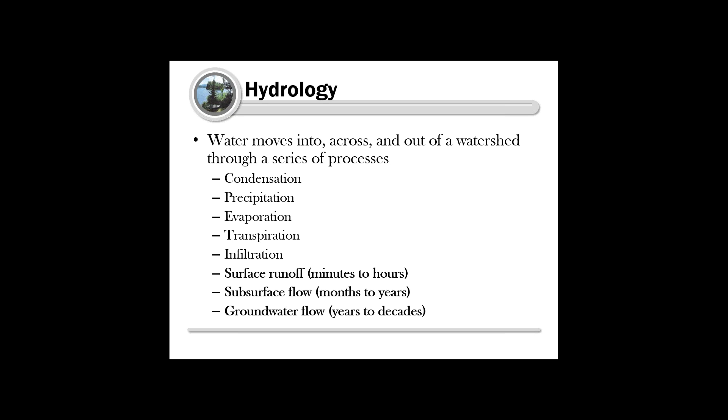For instance, surface runoff, which in a natural landscape is a small portion of where the water moves as it hits the ground, is on a really short time scale, sometimes seconds, minutes, and hours at the longest. Subsurface flow, like your shallow groundwater flow, is on a longer time scale, months to years. And deeper groundwater flow can take years to decades. That's the time it takes to complete the cycle, falling from precipitation and then being evaporated back up into the atmosphere.

So like I just touched on briefly, in natural systems hydrology, although there's real variability in any natural forested conditions, they'll look something similar to this process diagram, where you have 40 to 50% evapotranspiration, but anywhere between 1 to 10% would be in runoff, so the water hits the ground and flows directly off the surface and into a water body. You get about 25% shallow and 25% deep infiltration.

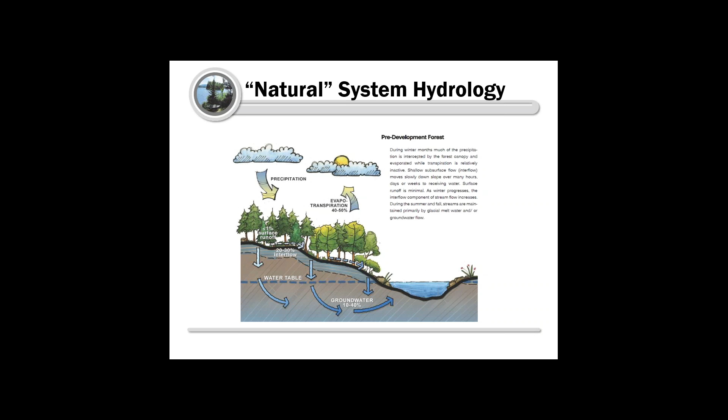The important thing I want you to take away from this slide is that the largest percentage contribution to water uptake in a natural system is through evapotranspiration. It's 40 to 50%. So trees do this work. This is what we're trying to mimic when we move over into green stormwater infrastructure. It's the sum of evaporation and transpiration movement through the plant and out into the atmosphere, and it's a really critical part of the water cycle, without which major disruptions would happen.

So what happens when we disrupt the water cycle? This is a schematic of what the water cycle looks like after we've removed trees and developed a lot. Humans have a tendency to alter the hydrologic cycle because we're involved in agriculture and industry. We put in dams, we deforest, we withdraw groundwater, and we urbanize. All those alterations lead to really drastic disruptions: reductions in evaporation and transpiration due to vegetation clearing, reductions in water holding capacity due to compaction and removal of topsoil, and increased surface runoff due to additional impervious cover.

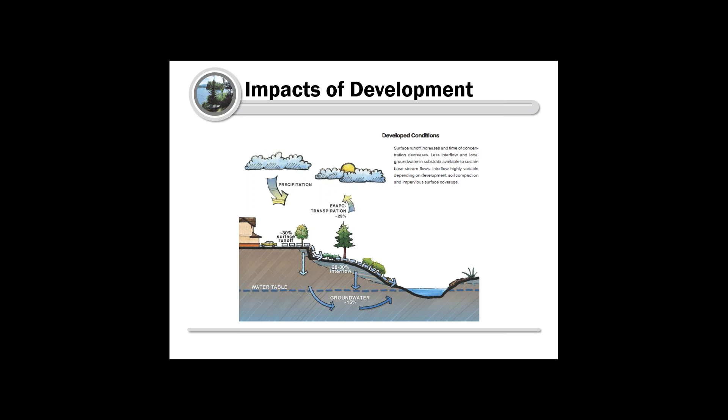The most important takeaway from this slide would be the change in evapotranspiration from 40 to 50% in the natural cover environment down to 25% in developed conditions. That's almost a half, or if we go with the 50% rate, that's a half reduction of what was happening in natural cover. The other notable change is the drastic increase in surface runoff. It moved from less than 1 to 10% to about 30% of the water that falls now running off. And these disruptions have a significant impact on water quality.

12% of the total acreage of Lake Champlain is considered impaired for aquatic life, and 38% of the total acreage of all other inland lakes are impaired. Certainly, stormwater runoff is not the sole reason, but it's a major contributor. I like showing this slide because it helps put this in perspective. One issue with stormwater is that it is dirtier than rainwater, but the other problem is the volume it contributes to natural systems.

So for a 1-inch rainstorm over an acre, if you did the calculation for forest runoff, you would have just under 3,000 gallons running off that lot. The rest would be taken up by trees or infiltrate into shallow or deep groundwater. In an urban environment, you could have upwards of 15,000 gallons. So it's a huge increase.

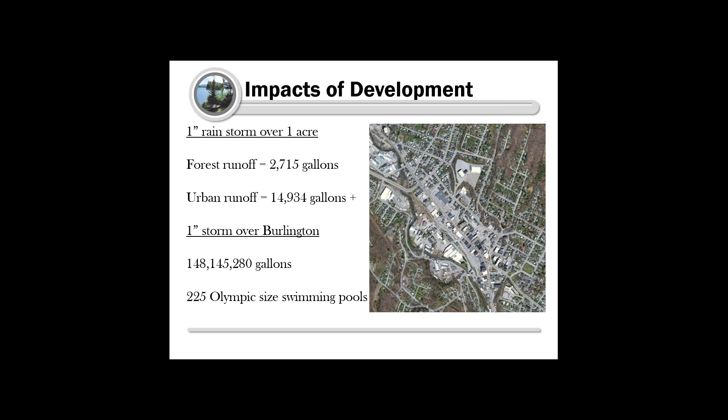We talk about urbanization. If you spread that over downtown Burlington, when we get a 1-inch rain event, you're looking at 148 million gallons of water. Or for those who like to think in Olympic-sized swimming pools, it would be 225 of those. It's a huge volume of water, and really too much for our little streams to handle. So how do we handle it right now? Largely, we use traditional or gray stormwater infrastructure, which treats stormwater as a waste. It's not a resource.

It's considered last in the design process. These are the pipes, conveyance strategies, centralized holding ponds. It looks mostly at surface runoff. It's reliant on large infrastructure, and there's no effort to try and restore natural hydrology. It's really just about addressing the surface runoff volume problem.

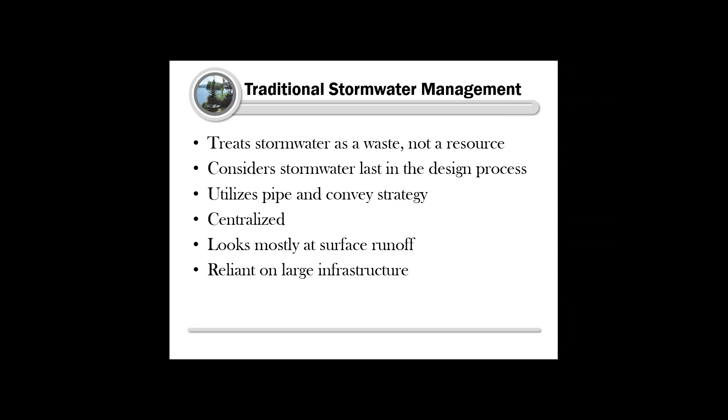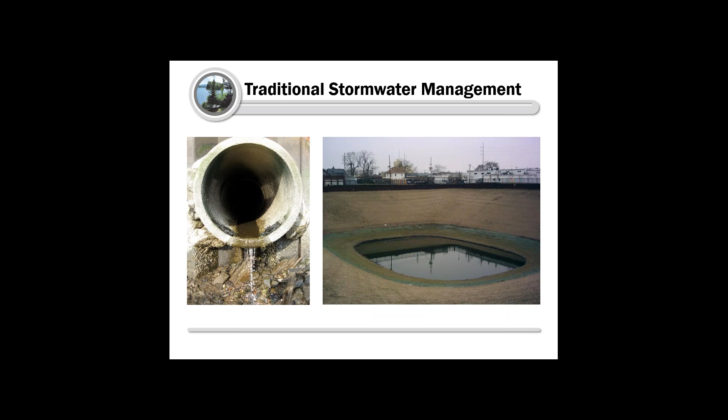So these are just a couple of photos that probably look familiar to most of you, a detention pond and an end of a pipe. And what happens with this traditional stormwater management is it leads to the same thing. It doesn't really solve many of these problems. You're looking at sedimentation and erosion, nutrient loading to the streams, bacteria, trace metals, trash and debris, reductions in base

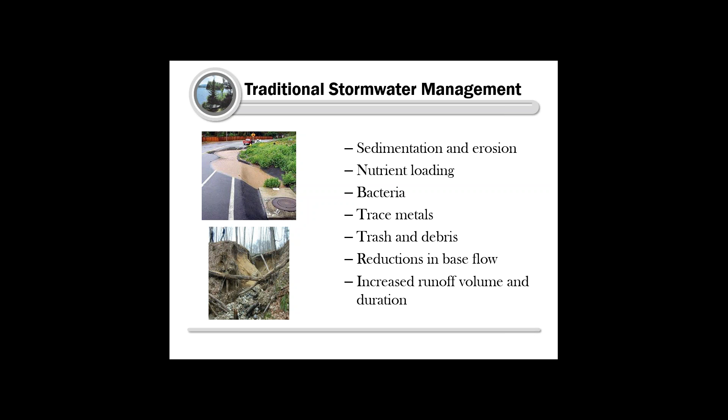flow to your streams. And what that means is if you have a base flow of a stream in a natural environment, it will always flow at about the same rate when it isn't raining. You don't get huge spikes and troughs in the flow. And in an urban environment, you could see streams that would dry up in the dry months and then be really heavily overfilled after a rain event. And it isn't good. You end up with that erosive look like you see with that photo on the bottom.

So what's the alternative? I'm going to talk a little bit about low-impact development just to make the point that what our program does, and it's really a movement across the country and in other places in the world that have been doing it for longer. We're trying to reverse the way we do development so that you don't end up treating stormwater as something to manage at the end, but rather part of the design process.

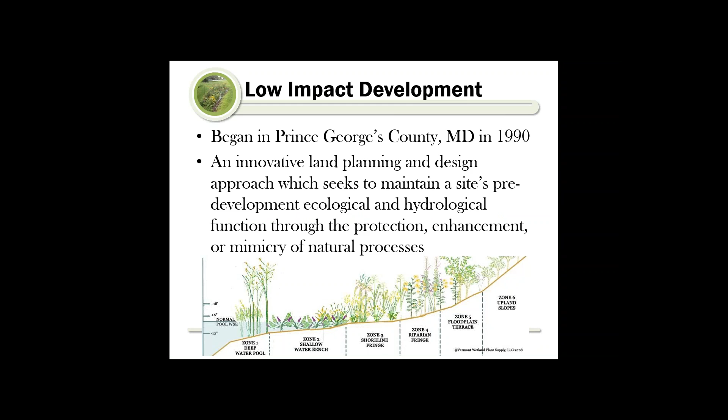So the term low-impact development was coined in Maryland in 1990, but it's really a land planning and design approach, and the goal of it is to maintain a site's pre-development hydrologic function, and you do that through the protection, enhancement, and/or mimicry of natural processes. So basically you're leaving natural areas alone, and then you're minimizing disturbance from the development itself.

And what it means in practice is just avoiding groves of large mature trees, keeping away from established wetlands, while developing in a lot. And these are sort of the key terms associated with low-impact development, which may be familiar to you. Minimize total disturbance, conservation, disconnecting stormwater, protecting sensitive areas.

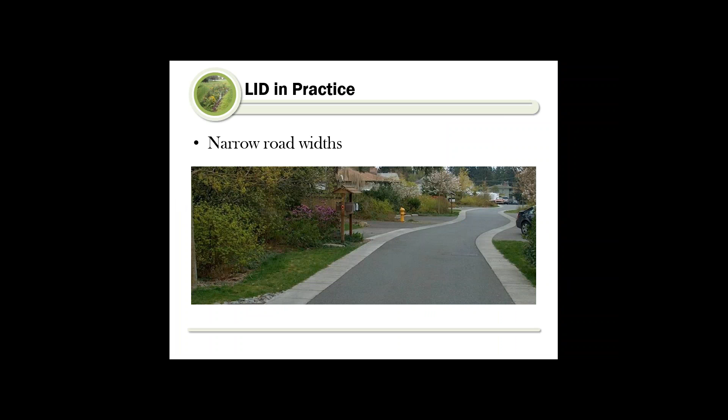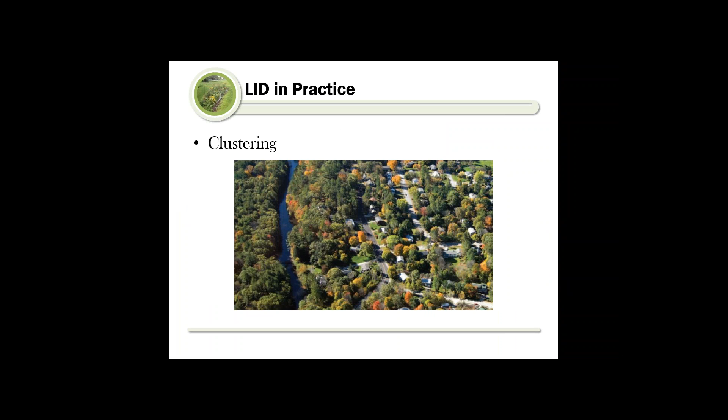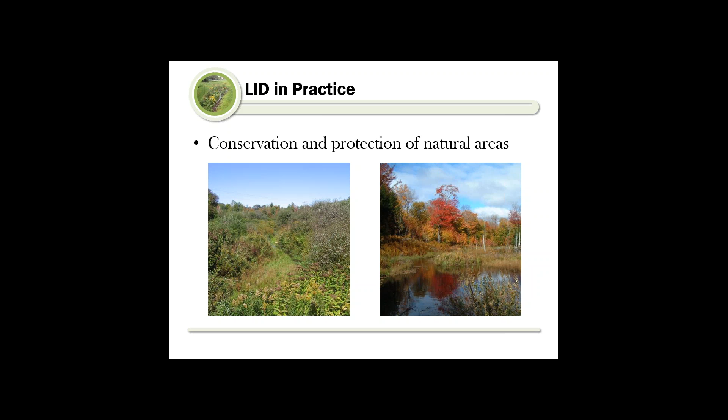So what it looks like in practice is narrower road widths, clustering your development, so you still have wide swaths of undeveloped forested land, but maybe the same total number of structures, but in a smaller area. And conservation and protection of natural areas. And this is true for large swaths of natural areas, but it can also be true for individual trees, where you have a specimen that should be protected and can't be replaced with less than 30 years of growth.

But why? Why are trees important, and what do they do exactly to make them valuable for stormwater management? Well, everyone here today probably has some affinity for trees, and there is a lot to love. They improve regional air quality, reduce stream channel erosion, improve soil and water quality, provide habitat for terrestrial and aquatic wildlife, reduce summer air and water temperatures. There's also research linking them to increased property values, community placemaking, urban heat island mitigation, and an increase in

general feelings of well-being. But today we're focused on one more reason to love trees, and that's their incredible and really unmatched capacity to reduce urban stormwater volume and to improve the quality of the water flowing to our streams and lakes. So they do that by three main processes. The first is interception. So a large mature tree can intercept more than 2,000 gallons of stormwater in a year just by capturing it in its canopy as the rainfall falls on them.

And trees also capture through leaf interception the initial 1/10 of an inch of rain. There's some variability in the studies on where those numbers come from, but the best number I was able to find is about 1/10 of an inch of a rain event. The other thing they do, which has to do with interception, is reducing the rainfall velocity. So you end up with less erosion.

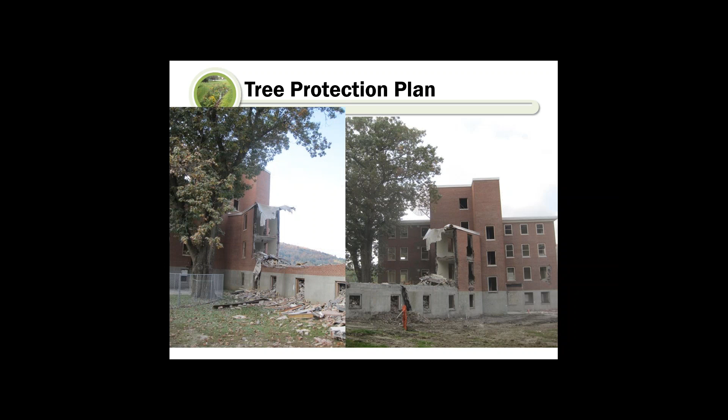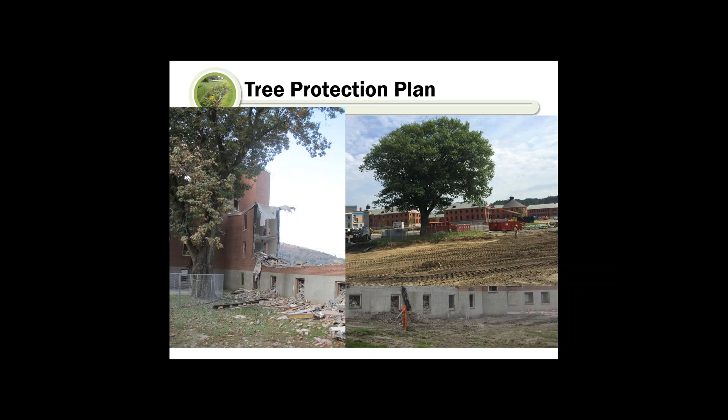And he had this series of fantastic photos that he sent. So this is a gorgeous oak that's right next to this building that's being dismantled, and you can see it's in really close proximity to this building that's coming down. In this photo on the left, that tree is really right up against that structure, and it was able to be protected because they went through a really careful process. Here's a great one. There's just construction all around this tree and compaction, but that tree is surrounded by a chain link fence to make sure that construction vehicles can't go within an area where the roots are and potentially damage the tree.

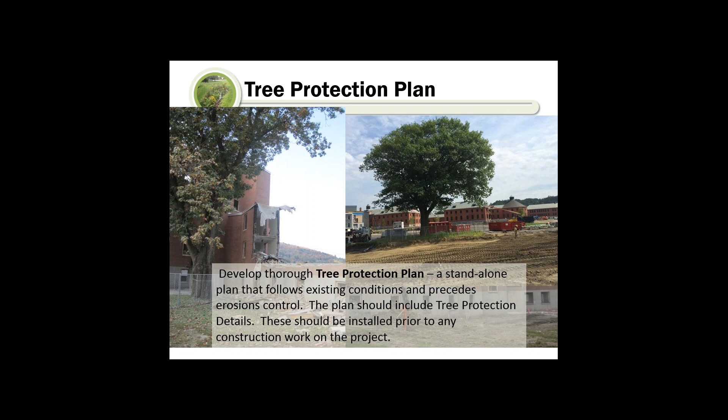So Adam said the second thing that's important about protecting large trees in a redevelopment site is to develop a thorough tree protection plan. So a standalone plan that follows existing conditions and precedes erosion control. So the plan should include tree protection details, and that should be installed prior to any construction work on the project. So these photos really exhibit how they were able to go about that. Some fantastic photos of these large trees really in the midst of what might seem like a chaotic construction site, and they're being really carefully protected.

So this is a schematic of what the tree protection standards would look like. And Adam said this was really important too, that they needed to have tree protection details and specifications. They developed thorough specs that the contractor was responsible for. And he said it really was important to include fencing, signage, root pruning, conditions for filling and excavation, monitoring, and then also a plan for payment for any damage.

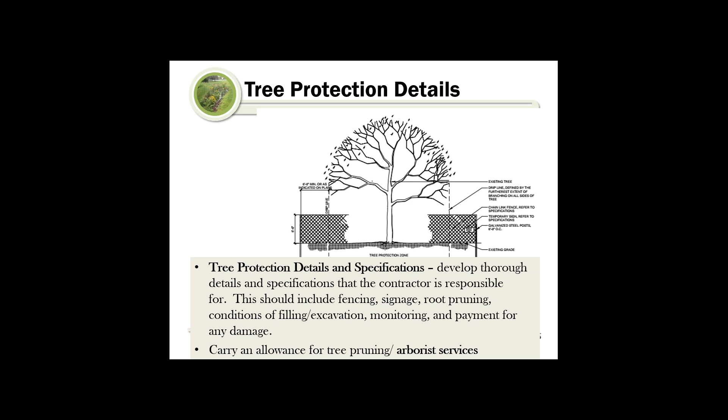His point here, I think, is that preserving these trees was so important that in order to make sure that it happened, it really needed to be an official part of the design and planning for the project. Lastly, he said it was important to carry an allowance for tree pruning and arborist services, so that that's part of the budget heading in, that it isn't really just all about the roads and the buildings, but the trees were an important part of the project.

Lastly, Adam had mentioned that construction administration was really important. So he used the word relentless, to be relentless in monitoring and talking with contractors about the importance of saving the trees. He said they would be on site, and if fencing was moved for some reason, they were alerting construction workers about the conditions and the need to locate all the fencing as per the contract documents.

And that's probably not a surprise for anybody who works on construction sites. It's important for any oversight that you really need to be present and make a point of reminding people of what the priorities are. But I thought that was a great reminder that in protecting trees, that was an important piece of his work on this site.

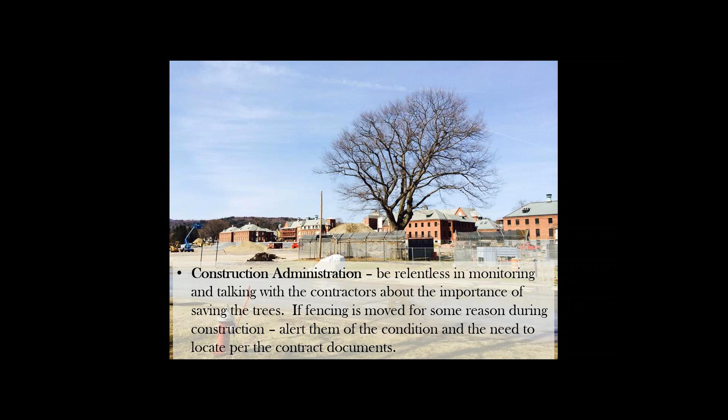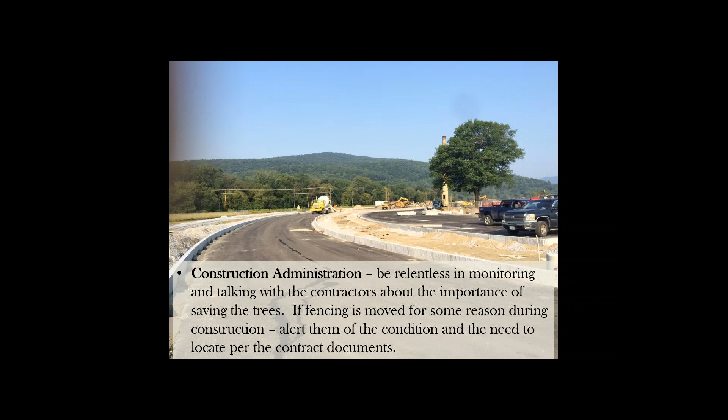Some other photos from the construction project: that beautiful tree on the right-hand side surrounded by fencing, and then really out from there it's got to be compacted soils and a more difficult living environment for the tree for sure. So here's this tree surrounded by the fencing during construction, and then Elise sent this gorgeous photo from just this weekend, same site. Let's go toggle back and forth there.

So we talked a little bit about low-impact development and how that's really about site design and preservation of natural infrastructure and high-value vegetation. But what's the difference between that and green stormwater infrastructure? This happens to be important to me because it's in the title of my job, so I feel like I have to always make a distinction between the two. But I do think it's an important distinction.

So green stormwater infrastructure, that term was coined later, around 2007 by the EPA, versus LID, or low impact design or low impact development, which was in the 90s. And green stormwater infrastructure really refers to systems and practices that restore and maintain natural hydrologic processes. They're physical infrastructure. It's not a design process. It's really the physical thing. And the goal is to reduce the volume and improve the water quality of the built environment.

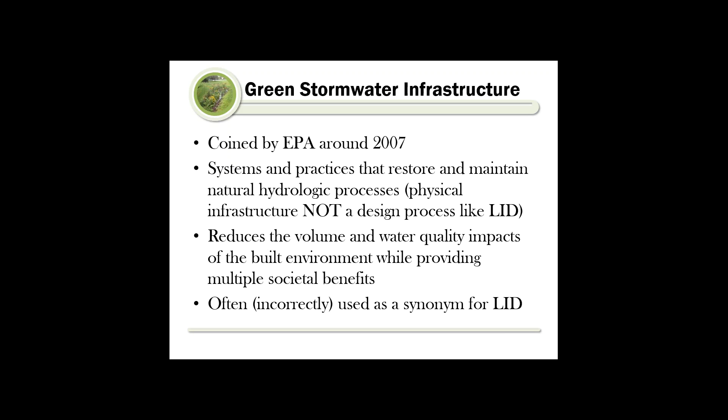It's often incorrectly used as a synonym for LID, but they are different, and I think it's an important distinction. So for LID, the focus is on preservation or the process, and in GSI, the focus is on the actual infrastructure. And this is often most focused on new installations, and there's some design and engineering component of it.

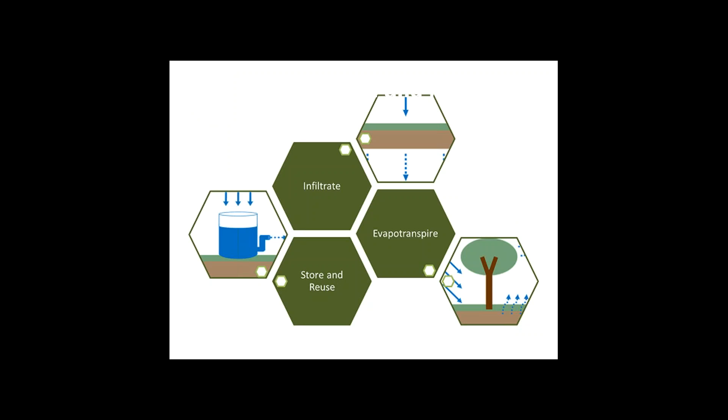So these are the three principles that GSI sort of works within. All the practices that you hear described as green stormwater infrastructure will achieve one or more of these goals to preserve natural pre-development hydrology. Notice that trees alone achieve at least two of these, infiltrating and evapotranspiring. So I think that's pretty awesome. You get 2/3 of any of the options you would get within green stormwater infrastructure just by planting a tree.

So what's good for trees is also good for stormwater. So this is part of what I mentioned earlier about the connection between healthy trees and healthy soil. Trees like well-drained soil with 50% pore space for air and water, and that means no compaction. So that was one of the elements that was really important about that Waterbury process, was not compacting the soil around the trees. It has a high exchange capacity.

It needs healthy, diverse biology in the soils, and that's the same thing that's good for stormwater. That's the same thing we're trying to achieve when we do infiltration practices and bioinfiltration. We're trying to get no compaction, high exchange capacity, and 50% pore space. We need healthy, large plants, which, when we're talking about plants, really means trees. And in order to get those, we need healthy soils.

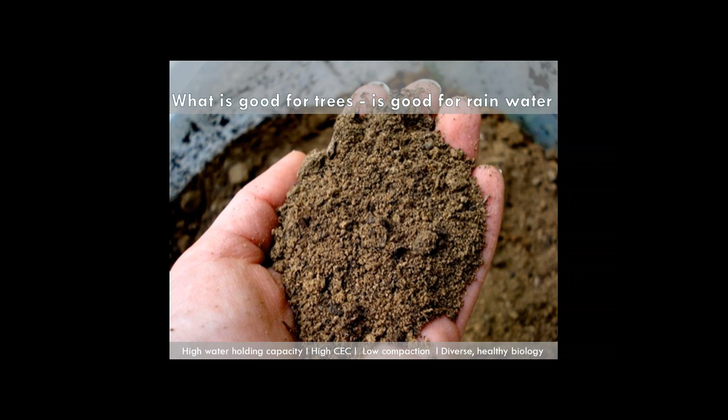And in many bioretention installations or rain gardens, you have smaller plants, and you certainly wouldn't be getting the same evapotranspiration quality or the interception quality that you would with a tree. So you're really relying on the soils. And the point is, if you have a tree that has enough soil volume, you get the benefit both of these healthy soils that are able to absorb and hold water, and then also the incredible benefit of the tree to uptake that water and move it back up into the atmosphere.

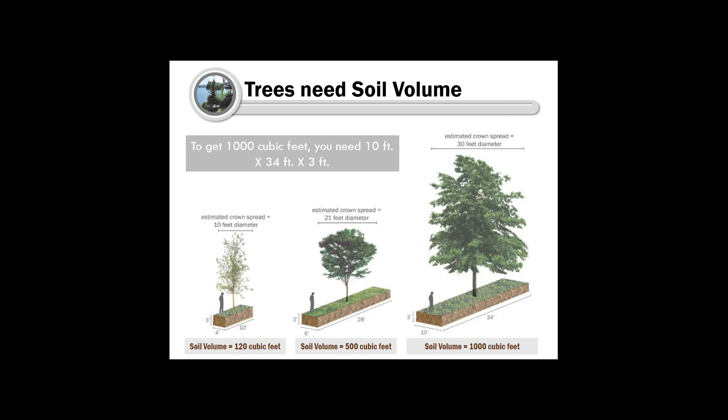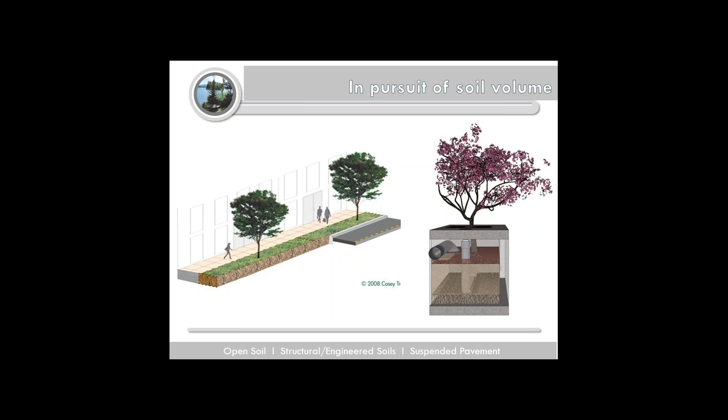So this schematic shows clearly the relationship between the available soil volume and the crown or the spread of a tree. If we want big trees, we need big soil area for the roots to access. And in large grassy areas, like on campuses like that Waterbury complex, that might not be that hard. There are these big, wide open lawn spaces. But giving trees access to lots of soil is more difficult in urban areas. How do you get the soil volume you need and keep your roads and buildings and sidewalks intact that are all really built up right around and adjacent to trees?

Well, here's one method. The Silva Cell gives access to lots of uncompacted soil, even in dense urban environments. So it'll look like any other street tree box, but it has the added benefit of giving the tree and our stormwater what it needs, and that is soil volume. There are other products and methods to get at this endpoint, but the important element I'm going for here is that it allows the tree to access lots of soil volume that it needs in order to get big.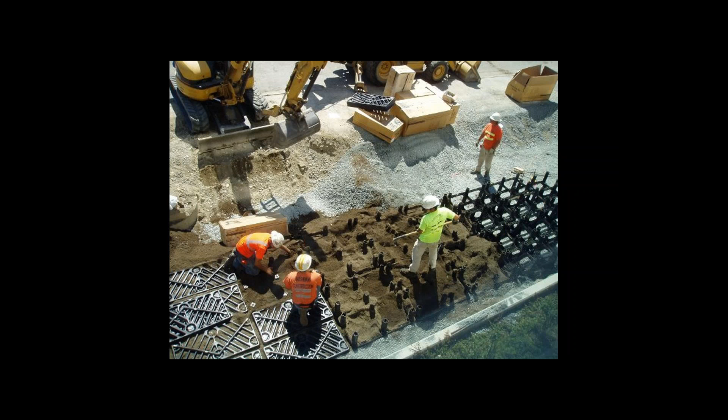So what is it exactly? It's really just this matrix of underground supports that hold up the pavement for sidewalks and streets. And it makes room for large volumes of this fluffy soil for tree growth. So essentially, it's just a way to maximize the volume of soil available for big, healthy trees without taking away space in tight downtown areas that is needed for parking spots and driving surfaces and sidewalks.

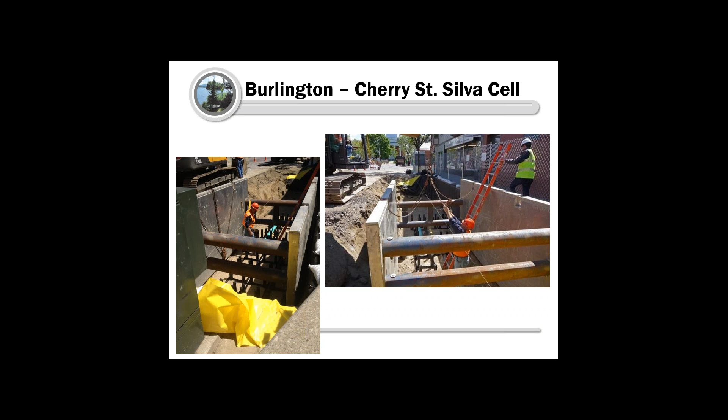So we have some of these in Vermont, and I'm just going to talk a little bit about an installation in Burlington on Cherry Street, right downtown. It's almost at the cross street of Church, if you're familiar with the area. So this particular installation went in about 2 years ago, maybe a little bit more than that now, and it was designed as a flow-through system. So it would take water from a storm drain inlet the tree was sitting in, and it was accessible. And it would discharge this cleaner and less volume water back into the storm sewer on the other side of it. So here's a little cross section of that Silva Cell.

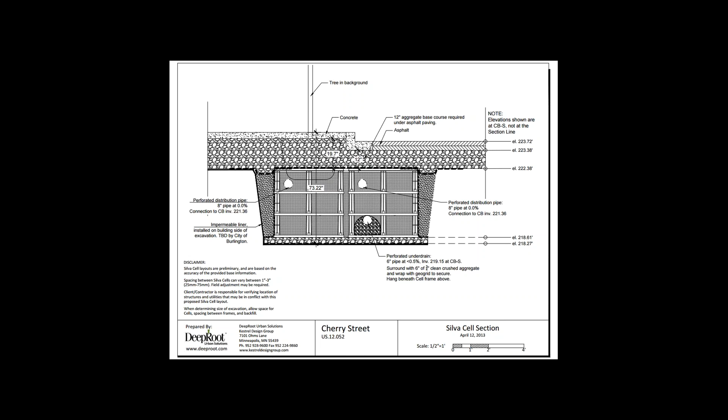So you have the water coming in from an inlet on the street, flows through the system, and then this is the Silva Cell installed. So you can see on the left where that new pavement is that runs in front of and behind the tree. So that's where the sidewalk was dug up, and also a portion of the street was dug up in the same lateral space, but then out into the street. And that was all dug up and installed with that matrix and filled in with all that soil volume.

It's pretty expensive for a street tree, but the life expectancy and the maximum expected growth for this tree is far greater than any other species that would be grown in a box. So a little update on the status of this project. The inlet to the Cherry Street Silva Cell is actually currently blocked. So what happened here is that an adjacent landowner reported experiencing basement moisture problems really soon after the Silva Cell was installed. This also happened to be during a really wet spring.

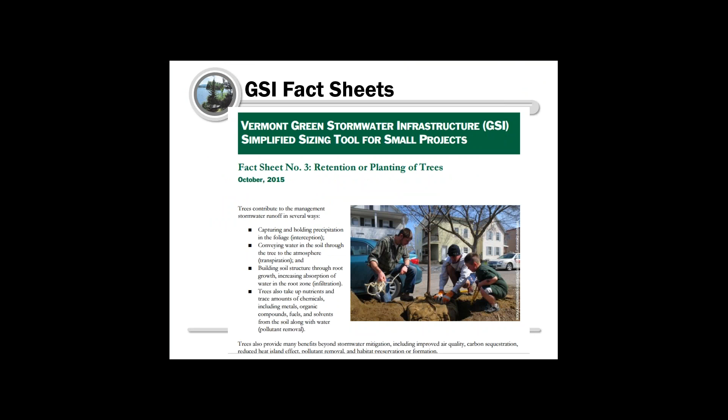So there's 10 fact sheets in this series, and they include information on soil depth, the rain gardens, bioretention, grass swales, cisterns, rooftop disconnection, dry wells, all the stuff we went over at the beginning of the presentation. But most germane to this discussion is this section on trees. And fact sheet number 3 is dedicated to determining the potential stormwater credit for retaining existing or planting new trees.

And they include detailed guidance on how to protect trees during construction, some of those things that we had learned from Adam about how they protected those trees at the waterway complex. The same principles can be applied to small sites. And they give you guidance on how to determine if a tree would be eligible for stormwater credit. Now, granted, maybe you don't get any stormwater credit for planting a tree, but it still is a useful exercise to go through and look at how to get the most out of trees if you are looking to get a stormwater benefit.

Most important is the size and the proximity to impervious surfaces. So they're looking for the proximity to impervious surfaces to be 20 feet or less. And they also have information in there on maintenance and care during establishment and replacement timeframes when those trees should be replaced with new ones. And the fact sheets and the associated sizing tool provide developments with a quantitative way to measure the value or the offset in terms of impervious area.

So it's essentially a tool for incentivizing the protection and planting of trees, among other things, in terms of stormwater. So it's a really neat tool. If you haven't checked it out, I think you'll enjoy it. In terms of these fact sheets and this sizing tool, the credit can't exceed 25% of the total impervious area for the site, because the idea is that you don't want to be able to plant a bunch of trees all jumbled up in one area and then pave over the rest of your site and think you're going to get a 100% credit.

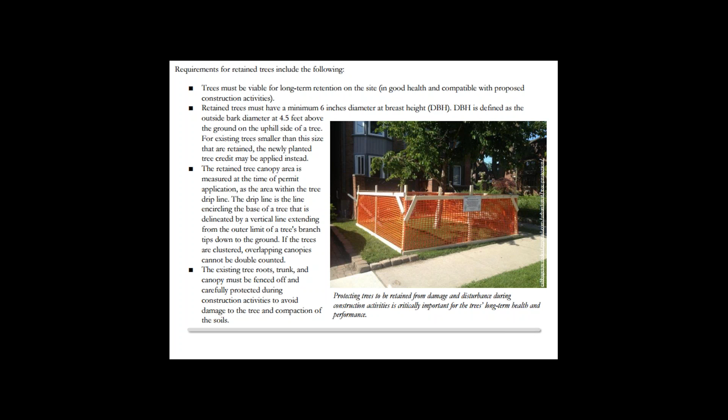So we're going to check out the sizing tool right now so you can get a feel for it, and then I'll share all this material at the end so you can play around with it yourself. So I'm just going to go back here. So they're both on the Vermont League of Cities and Towns website, which you can access easily. So it's an Excel document, which is great. I think it's helpful if you use the fact sheets in conjunction with the sizing tool, because the fact sheets lay out the background that you need to know, and then the sizing tool gets into the nitty-gritty.

So you'll see here there are all these different sheets in the Excel doc. And the first one gives you these instructions. It sort of says, okay, this is what's going on here, this is how you can figure out what you're doing. And then each of the fact sheets has a page that you can click through and use. So for our purposes, we're going to go to number 3, tree retention and planting. So you can click on there. You can give it a project name if you want, those kinds of things.

And in here, in the design table, there's 2 different options. There's a retained tree and newly planted trees. And then within those categories, you can choose evergreen or deciduous. And then it gives you a sense of what the impervious area credit maximum is. So we're going to do a little make-believe. This isn't linked to any number, you would call it something like area number 1. So square footage of your impervious area. So let's say we're going to be putting in a garage that's 10,000 square feet.

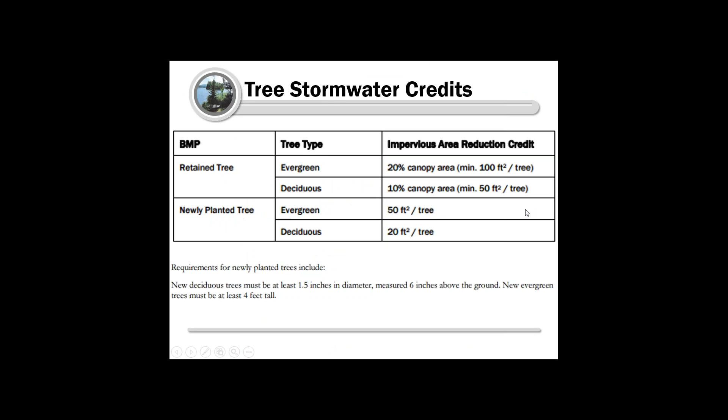I'll come back here. I'll let you all catch up. I know it takes a second there.